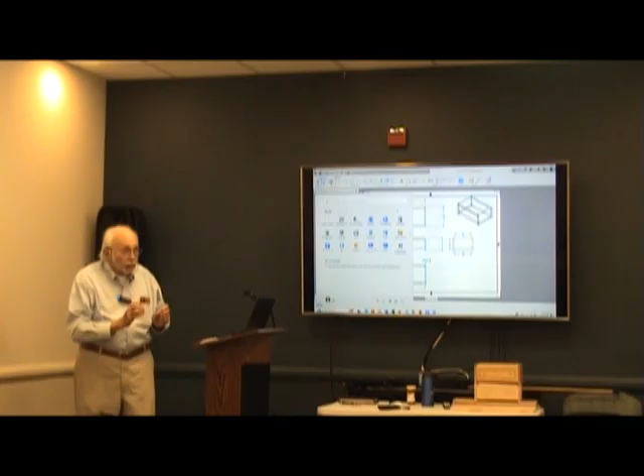So that's the capability of what a 3-dimensional drawing package can capture about a particular design. It can organize each component, giving me the source drawing for that component and the final simulated piece of wood for that component. So that is the 3D drawing package.

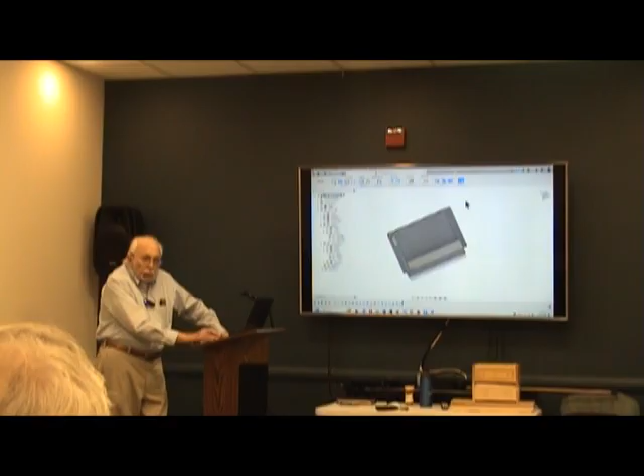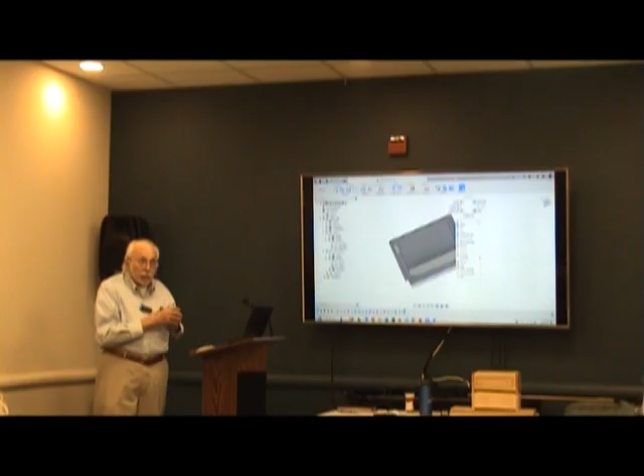Now, the products of this particular software have the capability of driving a router, a lathe, maybe the 3D printer. But it turns out we have a disconnect between what this software outputs and our computer control router. So we can use this tool for design work to put together a 3-dimensional design, but at this moment I can't take this software, convert it into a file, insert it into the computer control router, and cut these 5 parts. That's in the distant future.

Chris asked: this is Fusion, correct? Yeah, okay. I'm going to speak more to this particular piece of software later on.

It is available to us to use for the 3D printer, and in session 5, when we talk in detail about using the 3D printer, we'll come back to this software. The most useful piece of software we have is Vectric.

And if I switch over to the Vectric product, here it is, we can draw in 2-dimensional format. Then the Vectric product, through the creation of tool paths, can convert that 2-dimensional drawing into the 3-dimensional part for the box.

If I look at the drawing, here of course is the box top, and I've touched that outline to show that once it's highlighted, I can touch it a second time and move that rectangle where I want it, then bring it back to where I need it on the workpiece.

This would be the box front, the box back. This would be one of the sides, either left or right. They're symmetrical.

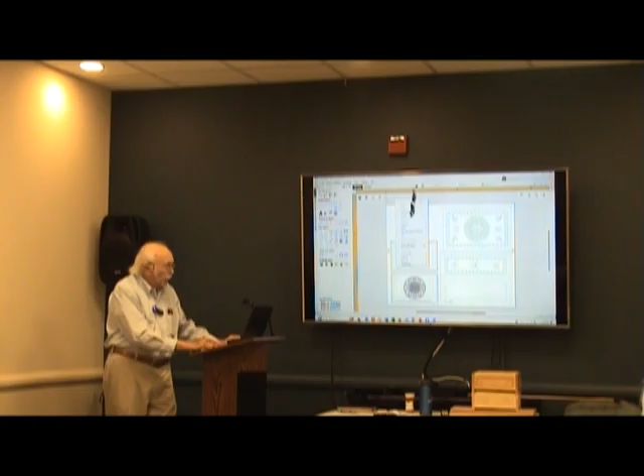If I turn it over, I see that on the back I could also draw, and maybe this would be the opportune time to think about looking at a decoration that's going to be on the end. Let me turn that. There it is, the decorations for the end of the box turned on, and if I turn it back over again, you can see the decorations for the top and the front of the box.

Before the night's over, we'll go into a lot more detail about this drawing.

I've talked about the 3D design, and I've talked about using the Vectric tool to draw in 2 dimensions. But once those drawings are done...

I started 4 years ago saying that the artist and designer does the drawing, and quite often that's the case, the same guy who eventually puts the plan together to cut the components. So the engineer comes along and identifies how to put the materials together for cutting by the CNC component tool, then creates the CAM tools to create the components. Let's see if the switchover works this time.

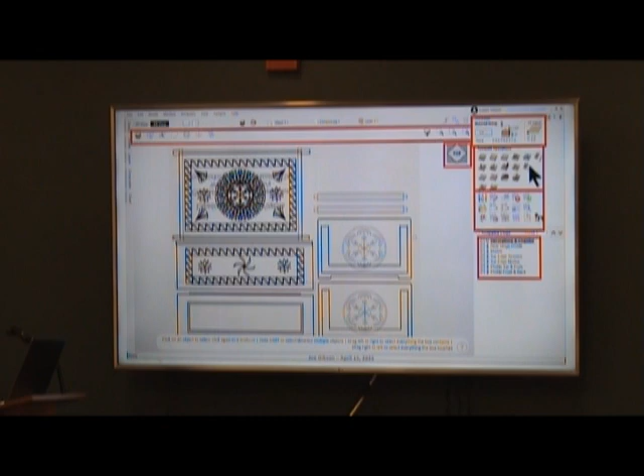You can see, I think you'll count 15. Am I right there? Is it 15, 6, 11, 14, there's 17. We had 15 in the prior version, we got 17 now.

Each one of these is a program fine-tuned to a particular type of vector, a particular type of toolpath.

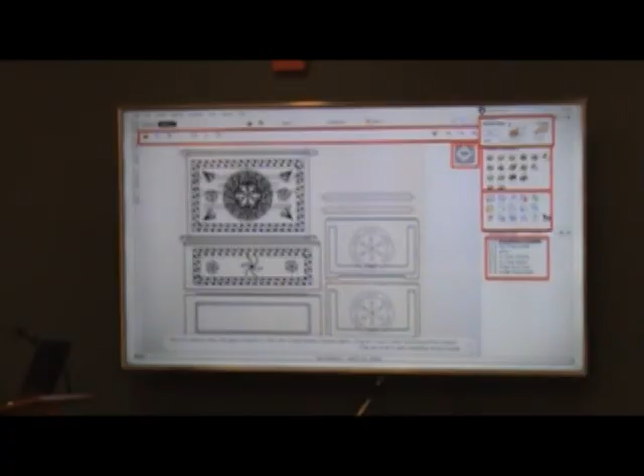Let me back up. For our project box project, we will need to use 3 types of toolpaths. There will be a V-carve toolpath that we'll use for decorations, or maybe cutting a chamfer. A chamfer is nothing but an edge with a particular angle along the side of a piece of wood.

I got it. So a V-carve would be used for decorations primarily. A chamfer is a decoration. We would be cutting a pocket. Now, the mortise that I referred to earlier that the sides are going to fit into is simply a pocket.

With a pocket, we're interested in telling it the vector that defines the pocket, and then we're interested in telling it the depth of the pocket. There are a couple other details, but those are the 2 primary ones.

And then the third toolpath we will need for our project box is the profile toolpath. Now, a profile is essentially a cutout. It's a less intelligent toolpath where you just specify a vector, whether it be a box, a circle, or a straight line, and you tell it whether you want to cut on the center of that line or on the outside of that line from start to finish.

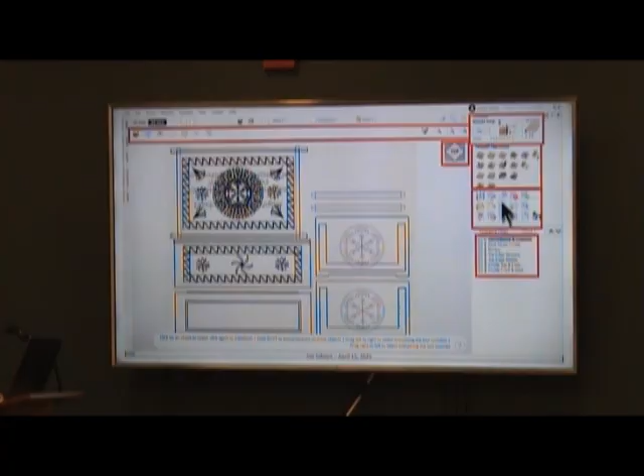You can see below that there is a set of icons that provide tools to manipulate toolpaths. Earlier tonight when I showed the simulation of a cut, it was this tool which will trace the toolpaths and provide graphics to show you how the finished product is going to look in the software.